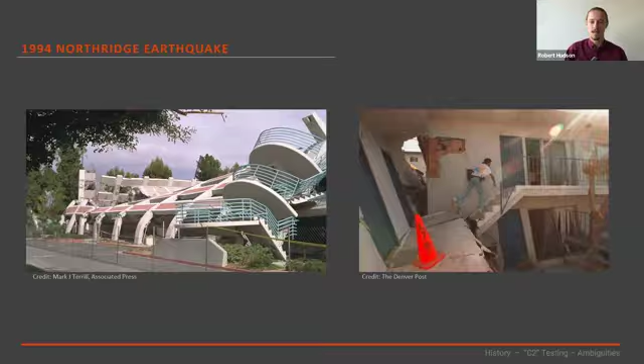But believe it or not, prior to this, the industry was using monotonic capacities in uncracked concrete to design post-installed anchors in concrete, which I suspect we can all intuit isn't going to be appropriate for a lot of the design we're doing for post-installed anchors in seismic regions. As a result, there was pretty widespread failure of anchors, among many other things, which is to some degree understandable in an event this size. But the anchors were really a highlight, or at least one of the highlights that came out of this earthquake in terms of learnings.

So much so that the US banned post-installed anchors completely in seismic applications for the best part of 2 years. This is kind of a timeline of what we have seen since then.

The industry, especially in the US, primarily led this effort, but there was an effort to put together a method for seismically rating post-installed anchors in concrete, basically looking at how concrete behaves, the cracking mechanisms of concrete, and the seismic actions we expect and allow for on anchors in a seismic event. The first codified method for this didn't get implemented until 2001, through the US Concrete Code, specifically ACI 355.

Interestingly, they didn't invent this method. The Canadian nuclear industry had already been using it for post-installed anchors in their nuclear facilities, which they deemed at the time, probably quite responsibly, that they should have a higher level of redundancy for post-installed anchors in these contexts. And so that was adopted into the American Concrete Code.

Then in 2013, the Europeans came to the party and developed what most of us in New Zealand are most familiar with, which is the C1 and C2 tiered rating system for post-installed anchors.

A quick note on the code terminology. In 2016, the Europeans did slightly restructure how they publish their codes. So while we're often familiar with the reference to ETAG 001 Annex E, this actually isn't quite the right reference anymore. They just restructured how they do their codes. The content didn't meaningfully change.

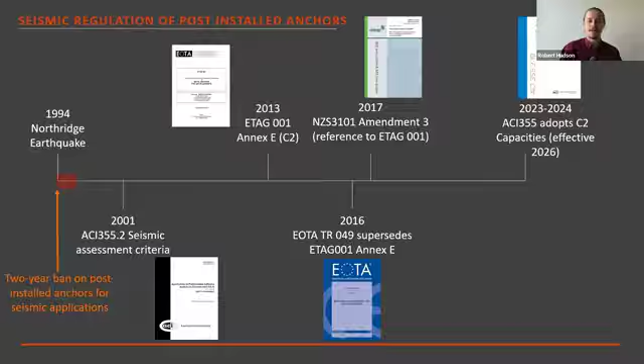And then 2017 is when we came to the party, and everyone on this call will almost certainly be very familiar with this. We start referencing the Eurocode documents and in effect start using C2 capacities all over the country.

What I think is really interesting about this, but I am a bit of an anchor nerd at this point, is that this really isn't a static part of our industry. This really is still developing across the world.

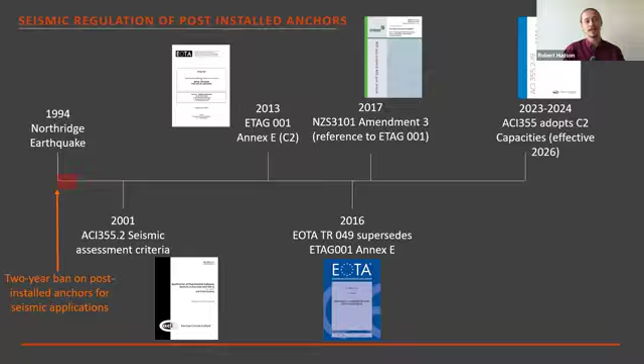In the US, the ACI 355 committee has already approved, and it's going through the process of getting implemented into the next code, pretty serious changes to ACI 355. They are completely removing what we consider as C1 and will be implementing C2 as the appropriate capacity to use for any anchor in a seismic zone in the US.

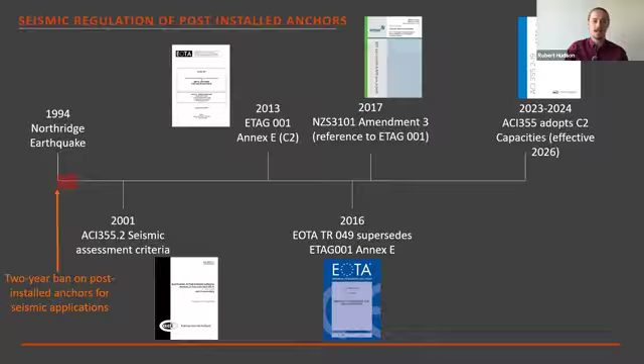So they will not even have the kind of tiered system that Europe has. They will just have the non-seismic zone and C2 capacities. This really does seem to be more and more the way that the world is moving in terms of post-installed anchor design.

Now, in terms of what we're doing in New Zealand, many of you will have seen and read this a number of times. All of this comes from one sentence in NZS 3101, which is kind of amusing: post-installed mechanical anchors and post-installed adhesive anchors shall pass the pre-qualification testing stipulated in ETAG 001 Annex E and be designed in accordance with EOTA Technical Report 045.

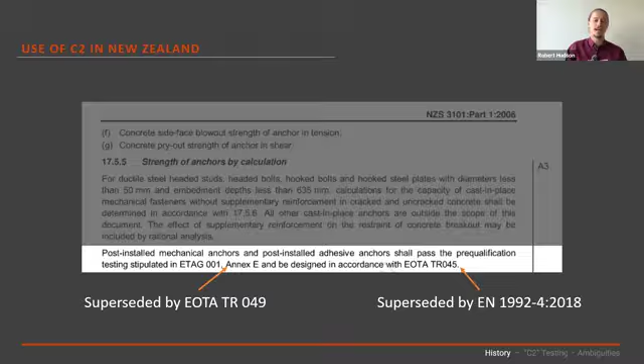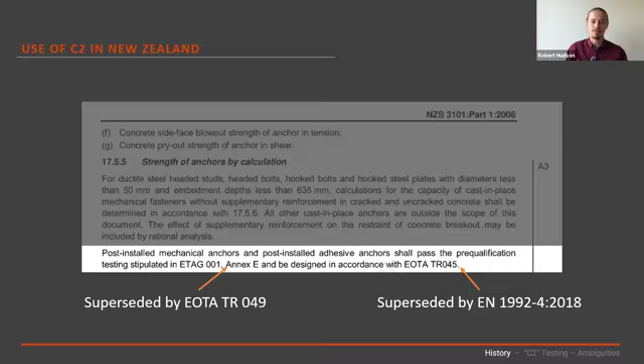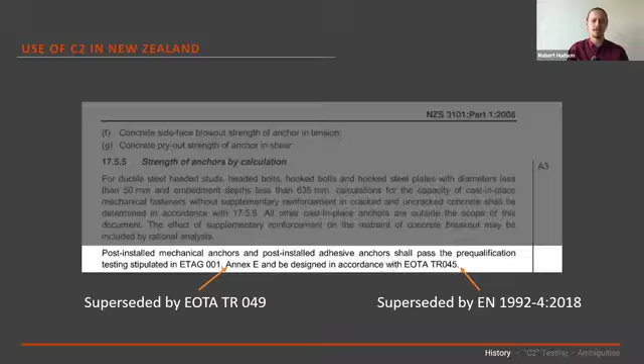As I mentioned before, technically both of these references are actually out of date. The significance of this in terms of content is pretty negligible, but I highlight it here so that if you see it in suppliers' documentation, the ones down the bottom are the appropriate codes to be referencing. The actual content difference is fairly negligible, but you'd expect to see on supplier documentation a reference to Technical Report 049 instead of ETAG 001.

And Eurocode 2 for the design.

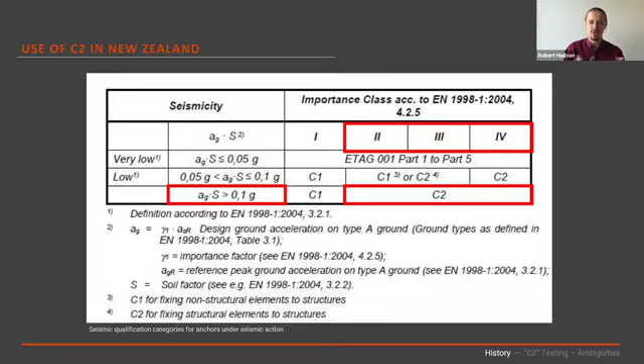In terms of why we have such a focus on C2 rather than C1 in New Zealand, this is the table out of Eurocode that defines what capacity you should be using for an anchor. It's basically just a function of seismicity and importance class. The importance classes in the Eurocode do align pretty well with what we have in 1170 in New Zealand, so for the most part you can just take them as a direct comparison.

The seismicity does take a little bit of effort to compare properly. There was a paper a couple of years ago, or maybe more recently, that was published doing an example calculation.

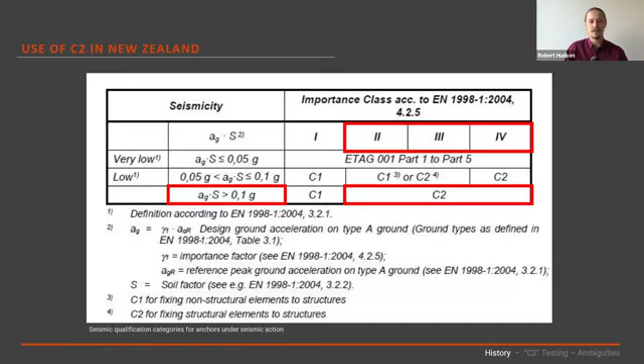It does give you slightly different results if you compare it directly to 1170. But as a general rule, for the vast majority of what we're doing in New Zealand, we have a seismicity greater than 0.1 G. And unless you're dealing with an importance class or importance level building 1, or you're dealing with a shack at the very top of the North Island, you're almost certainly going to be required, following our code, to be using C2 capacities. And that's the situation we're in, and why this is really front of mind for so many engineers in New Zealand.

Okay, so that's a little bit about how we got to where we got to. The next section here, I'm going to do a bit of a dive into the testing that we do, or any supplier does, to actually provide a C2 capacity, and some of the background as to why the testing is the way it is. I'm not going to go into the testing itself, the intent here isn't for you to be able to go away and do the testing. The intent here is I'm concentrating on the things that are relevant to be aware of and to think about when you're designing such anchors, so you can make appropriate considerations where it's relevant.

Now, taking a step back for just a second, there's two things we really care about with anchors in seismic scenarios or seismic locations in concrete. We care about the actions on the anchor, so that's the cyclic tension and cyclic shear behavior. And then there's also the behavior of the concrete, and more explicitly, the cracking behavior of the concrete. Quite intuitively, if we start having cracks in our concrete and our anchors are in those cracks, that's obviously going to impact the performance of any post-installed anchor.

Take the extreme case where your crack starts becoming wider than your anchor, it's going to fall out of the hole. Thankfully, we don't often have that scenario, but it's a spectrum, right? And the larger the crack, the more impact we have. But there is this baseline assumption when we talk about this, that we are allowing for, when cracking occurs in concrete, that crack will occur where that anchor is. And this wasn't just good judgment.

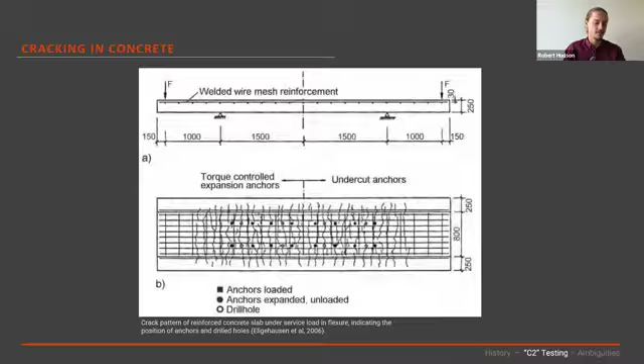This was actually based on a research program that was done in California in the 2000s. I've got a screenshot for one of the test results there. The idea behind this, and it was one of the test programs that was trying to build the data that was required to build these test programs for anchors, but what that was looking at is what is the probability that when we get cracking occurring in concrete, that crack occurs where our post-installed anchors are.

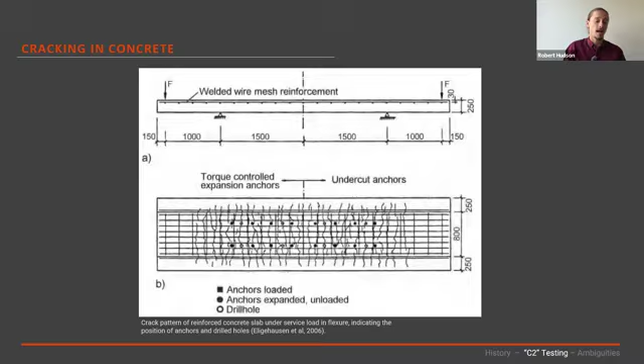And the key takeaway is that it's very, very likely, much above random. And this makes a lot of sense. We have a very homogeneous, or reasonably homogeneous material. If we put an anchor into it, it acts as a stress raiser. And then when we start getting cracking occurring in these concrete units, which we do even under just service loads, right, but definitely under design level loading, because you have a stress raiser there, there's a very, very good chance that crack occurs where the anchor is. And so the baseline assumption is that if we're putting an anchor into concrete or reinforced concrete, we are assuming that when cracking occurs, that cracking is going to happen where that anchor is. And that's a pretty reasonable assumption in my mind.

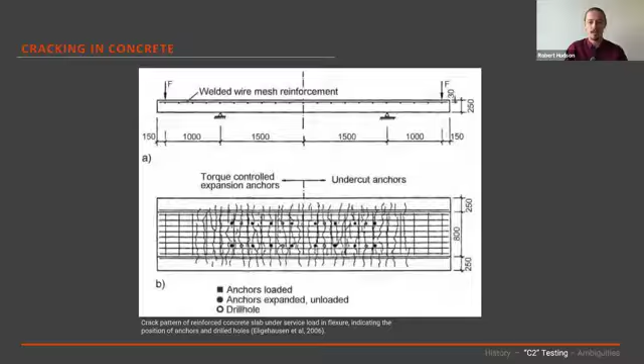The other thing we care about with regards to cracking is the size, right? The larger it's going to be, the more of an adverse impact it's going to have on our post-installed anchor connections. Now, there are two numbers to be aware of, and I suspect you're all going to be sick of me saying these numbers by the end of the webinar, but there is a 0.5 mil crack width and a 0.8 mil crack width. The 0.5 mil crack width is very roughly intended to represent service conditions and moderate seismic events, and this is the crack width that a C1 capacity is allowing for.

And then we have that slightly larger one, which is a 0.8 mil crack width, and this is what a C2 capacity is allowing for. That 0.8 mil crack width is intended to represent basically the scenario where you have a reinforced concrete beam. If you come just outside of the plastic hinge zone, and then you load that minimally reinforced concrete beam to the point where you just start getting yielding in the tension reinforcement, the 0.8 mils is a prediction of the crack width at that point in that scenario.

So when you're just getting yielding of your reinforcing in your concrete beams, that's what it's trying to represent, and that's what we use in a C2 test.

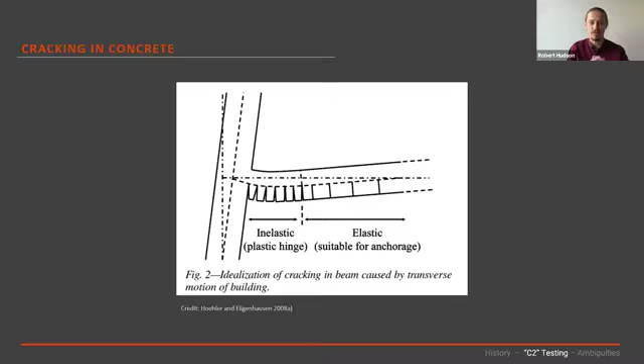Quick note, as everyone should be aware, there is really no test program or way for anyone to rate post-installed anchors in plastic hinge zones. The damage and cracking we expect in a plastic hinge zone in a seismic event is pretty dramatic, and nobody's providing you a capacity for that. As a general rule, if you're wanting an anchor to perform in a seismic event, you really probably just shouldn't be using post-installed anchors in plastic hinge zones.

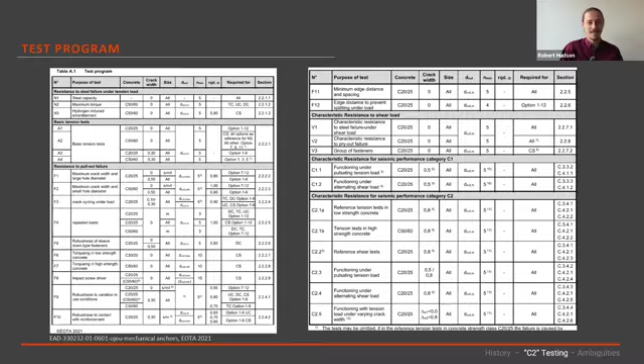Okay, the test program. So this is a snip from the European documents on the tests you need to run to rate a post-installed anchor in concrete. The ones of relevance for us are on the right-hand side in red. You can see the C1 tests for producing a C1 capacity, and the ones on the bottom right are all the tests you have to run for C2 capacities. There's actually a whole range of other interesting tests in here too.

So you have these tension tests. You are allowing for, in general, things like variability of drill bit diameter, the impact that slight changes in pilot hole have on anchor performance, things like over-torquing and under-torquing of different types of anchors. So there's a little bit of extra stuff that goes into the test program, but what we're really going to concentrate on in this talk is the stuff on the right, which is the C1 and primarily the C2 tests.

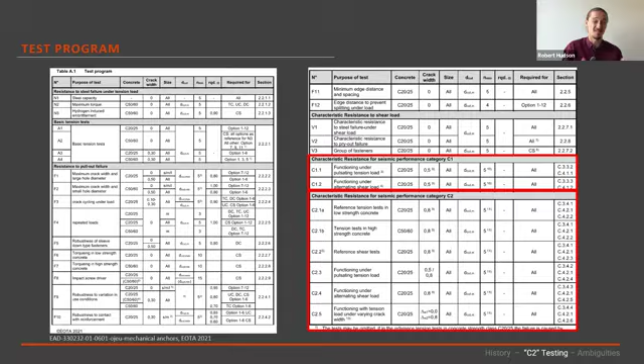And these tests can basically be boiled down to trying to allow for and quantify the impact of three mechanisms. The first one we care about is the impact of cyclic shear. This is quite intuitive: if you have a reinforced concrete frame or a steel moment frame connected for in-plane strengthening to a reinforced concrete structure, you're going to get cyclic shear behavior in your anchors.

The next mechanism is cyclic tension in the anchor. This is also quite intuitive — if you've connected strong backs or some such connection, you're going to get cyclic tension behavior in that anchor. These are the two mechanisms that a C1 capacity allows for. So when we do C1 testing, we're allowing for these two mechanisms, and for crack widths up to 0.5 mils.

What a C2 capacity additionally allows for is this last mechanism, cyclic crack behavior in the concrete. There's a number of scenarios where this occurs, but the clearest is if we think about a reinforced concrete moment frame beam. If we put that frame into a seismic event, we get moment reversal in the beam, meaning our cracks both open and close. Because we assume our anchor is in the crack, these cracks open and close around our anchors, which obviously impacts how the anchor behaves.

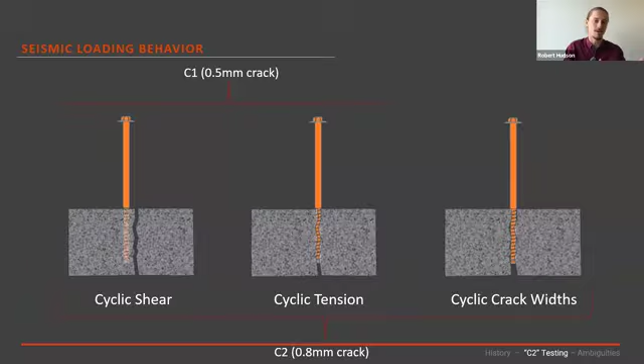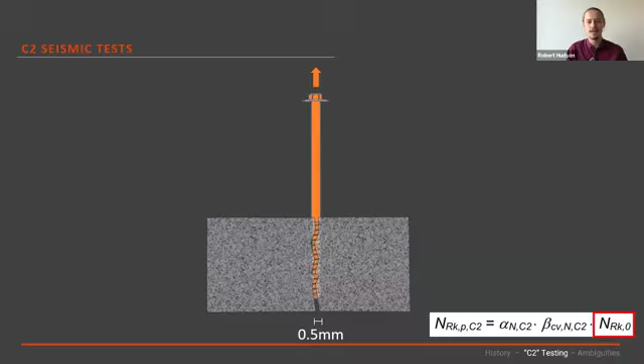Our baseline is just the monotonic tension capacity of an anchor in a crack. It's actually using the 0.5 mil crack, which is that moderate seismicity, serviceability kind of baseline performance of an anchor in a crack. And then we have this alpha and beta reduction factor that we apply.

The alpha factor is trying to represent the loss in load carrying capacity from each of the mechanisms that I showed before: your cyclic tension loading on the anchor, the additional wide 0.8 mil crack width, and the cyclic crack behavior around the anchor. The formula for C1, by the way, is exactly the same. It's just accounting for less mechanisms.

So we have a couple of tests we do. We have this monotonic test in the slightly larger crack width, which investigates what the additional crack width impact is. And then we do a cyclic tension test on the anchor in a crack, and we have the cyclic crack test. One thing to highlight here is that we don't actually superimpose the impact of the cyclic tension test

and cyclic crack test. This is quite good, because otherwise the capacities would be even lower. But this was based on a really nice piece of research that was done, again around the same time, in California or the University of Stuttgart.

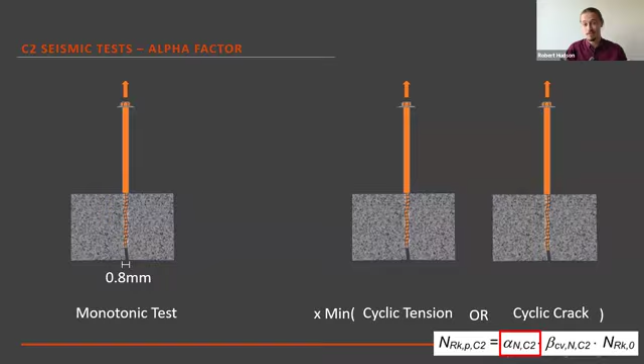What they did is they built a reinforced concrete frame. They put a simulated non-structural element underneath the reinforced concrete beam. They put it through thousands of cycles, and they measured across time the tension in the anchors and the crack widths. Basically what they found is that the maximum of each don't occur at the same time. So when we're generating these capacities, we actually just account for whichever one has the most adverse impact.

Now, to give you a sense of scale of the impacts of these two tests, this will vary quite significantly depending on the type of anchor you're using. Some anchors are quite resilient to some of these mechanisms, others are less resilient.

But it would not be unusual to expect a reduction factor from the cyclic tension test in the range of about 0.9, so maybe a 10% reduction in capacity. And the kind of reduction factors that I might expect if I was testing an anchor and putting it through the cyclic crack test would be in the range of 0.2 to 0.3, which is a 70 to 80% reduction in anchor capacity.

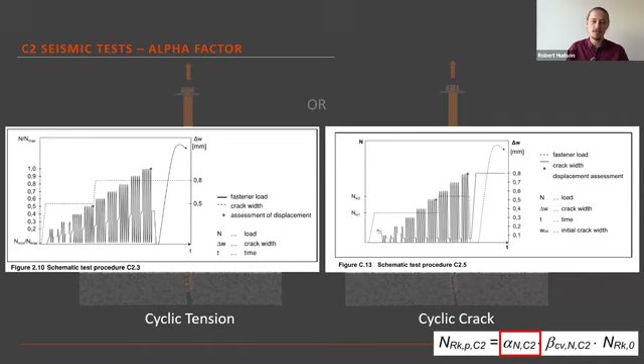Overwhelmingly, the reason that our C2 capacities are so much lower than what we used to use is because of the cyclic crack test. This is the test that C1 doesn't take into account, which is why C1 capacities are significantly higher.

Now, when we were doing this testing, we started playing around in our own lab with some of the variables. We wanted to understand the sensitivity of these variables, because you'd get some test programs where your variable is set as a number and you could increase it and decrease it, and it's not that sensitive and doesn't really have a big impact on the outcome. So we wanted to understand how sensitive these variables were to the end result we were getting. We played around with it a little bit, and the conclusion was they're incredibly sensitive.

The two variables that we care about here are the crack width, so that 0.8 mils, and the number of cycles that we're putting the crack cycle test through. If you have a crack width that's a little bit more than 0.8 mils, you get a significant reduction in capacity.

If it's a little bit less than 0.8 mils, you get a significant increase in capacity. Similarly for the number of cycles, especially at maximum crack width, if you add more cycles to that test, your capacity drops. And if you reduce the number of cycles, your anchor capacity increases significantly. This will be important for something I'll mention later in the presentation.

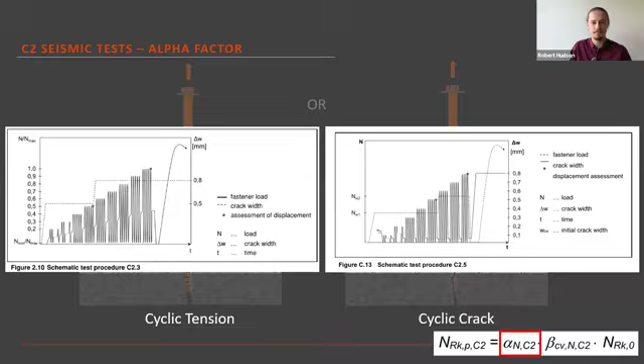Just quickly on the beta factor, what this is doing is accounting for displacement performance of anchors. It doesn't, in my experience, really have a big impact on the end result in terms of the capacity. Might have a little bit, but not a big reduction. But what it does do is it has pass-fail requirements.

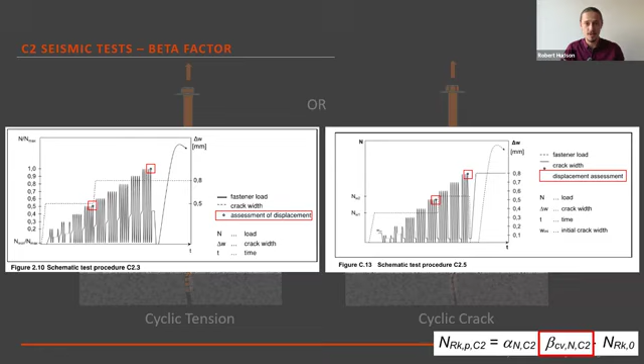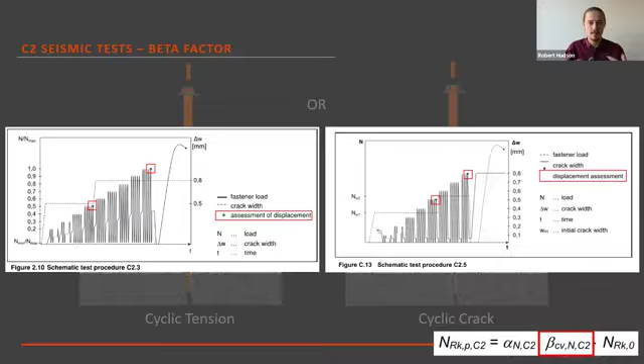It's making sure the two things it cares about basically is the spread of displacements across multiple tests. So what you're protecting against there is unpredictable displacement performance of anchors, which is not something we want. It also has a maximum displacement of 7 mils in the test. So if you have any anchor that is displacing unreasonably far in these test programs, it basically just doesn't allow it to get a C2 capacity. And these are pretty reasonable things.

We don't want our anchors to displace a huge amount when we're using them. We're not accounting for that in design. But the actual impact on the end result is reasonably minimal. It's more of a pass-fail kind of thing with regards to displacement performance.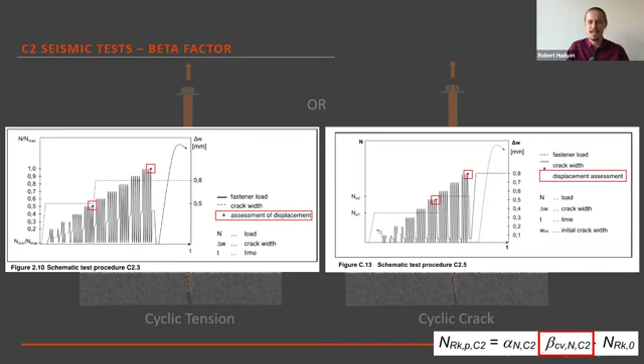Basically, when it's all said and done, that's where this C2 capacity comes from. There's a couple of vocabulary things that might be worth noting.

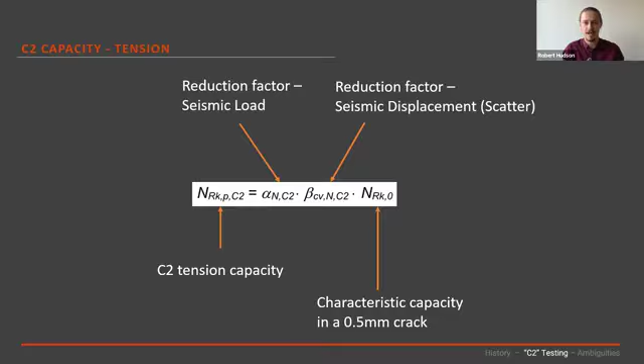You'll see in supplier documentation, or especially any European country that sells products in New Zealand, they'll be using the European language. We often call things capacities. The language you'll see published in documents from Europe will be resistance — synonymous, really the same thing. The reduction factor, the strength reduction factor that gets applied in Europe is called a partial factor, represented by a gamma. It varies depending on a couple of aspects, but often suppliers have already applied it. If that's already applied, you wouldn't then go and apply the New Zealand strength reduction factors on top of that. They try to achieve the same thing effectively.

All right, that is basically where tension capacities come from, C2 capacities. Obviously, you do a similar sort of thing for shear. I'm not going to go into this in the same sort of detail, but it is exactly the same philosophy. You start with your base shear capacity, you have reduction factors, your alpha and beta reduction factors based on the impact of the different mechanisms.

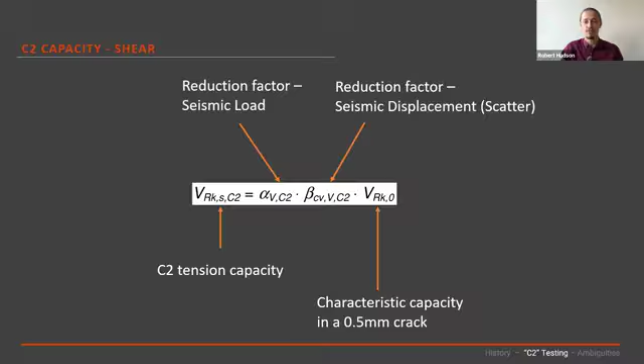Now, one thing that is interesting with shear capacities is we don't run that cyclic crack test. This is because someone did a really nifty study, which has probably saved hundreds of thousands, if not millions of dollars worldwide in anchor testing, that basically compared the impact of the cyclic shear test and the impact of the cyclic crack test on the shear performance of post-installed anchors, and basically found that the cyclic shear test was reliably more adverse. So we're able to exclude one of these tests from the shear testing.

Which means that the mechanisms that C1 and C2 are allowing for are actually the same. With regards to shear capacities, the main difference is just that we're allowing for a larger crack width. That does have a negative impact on anchor performance, obviously, but that really is the main difference between the two.

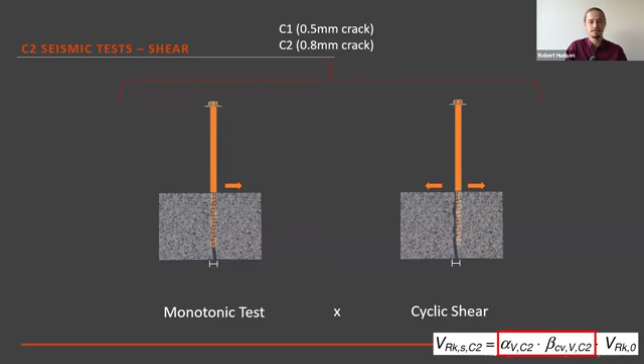And then that's actually the test you run for cyclic shear. You're bringing your anchor into negative and positive shear in both directions. Quite often, for some anchors, you start getting kind of steel failure governing, especially if you're at deep embedment, which is a really positive failure mechanism with regards to anchor performance, rather than pry out or anything like that. In general, even when you start putting seismic things into anchors, shear performance is a pretty reliable mechanism, because at the end of the day, you've got a piece of steel in a substrate.

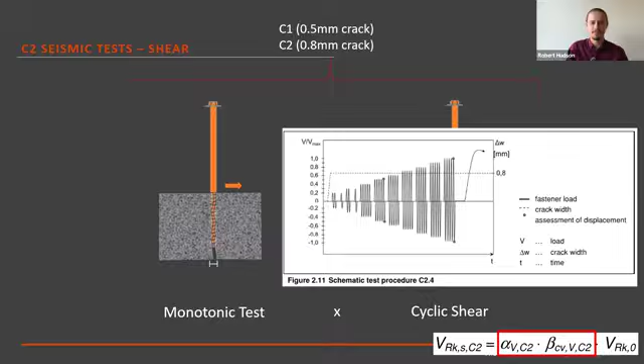Okay, that is, broadly speaking, where we are getting these capacities.

Now, this next section, I have a number — I'm basically wanting to highlight a couple of things that I think designers should be aware of and thinking about when you're doing these kinds of designs with these values. A bit of a caveat here: it's really easy to pick apart other people's work, and putting together these kind of test procedures would just be a monumental effort. The amount of research that is required, and even just the code development process, is a huge amount of work. But it still is useful for us to highlight where it doesn't fit what we do quite perfectly, so that designers like yourselves can understand what's going on and accommodate this a little bit better in design. So this is some of the kind of ambiguities around these test procedures.

Okay, the first one, crack widths. So I showed this image before when I was talking about where the crack widths came from. If anyone wants lots of bedtime reading, you can Google the Unified Crack Protocols, which is where all this comes from.

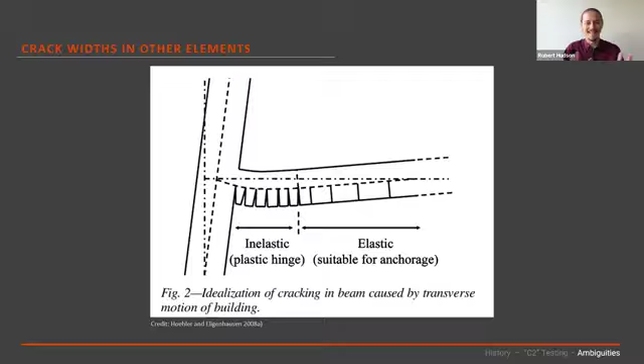But we have two crack widths that we care about when talking about C1 and C2 capacities: the 0.5 mil crack width and the 0.8 mil crack width. Now, I have not been able to find any published justification for the 0.5 mil crack width. I've talked to many people who are very knowledgeable in this area, I've looked myself, and for love nor money, we cannot understand where this 0.5 mil crack width comes from.

That's not to say it's wrong or misrepresentative, but I certainly don't, and nobody I know can really justify why we use 0.5 mils rather than 0.6 or 0.4. It's possible it was just a judgment call based on experience. From a design point of view, be aware that if you're using a C1 capacity, fundamentally you're allowing for a 0.5 mil wide crack maximum. If you're expecting cracks larger than that, your C1 capacity won't be a very good representation. If your cracks are smaller, your capacity is going to be a little conservative. So keep in mind that C1 capacity corresponds to that 0.5 mil crack width.

Now, there is published justification for where the 0.8 mil crack width for C2 capacities comes from. That's from a research study, and I've got a screenshot on the screen. It's basically looking at the elastic portion of a reinforced concrete beam, minimally reinforced, pretty standard size. You load it, and when you start getting yielding in the reinforcing bars, they used predictive crack width equations to estimate that the crack width at that point would be 0.8 mils.

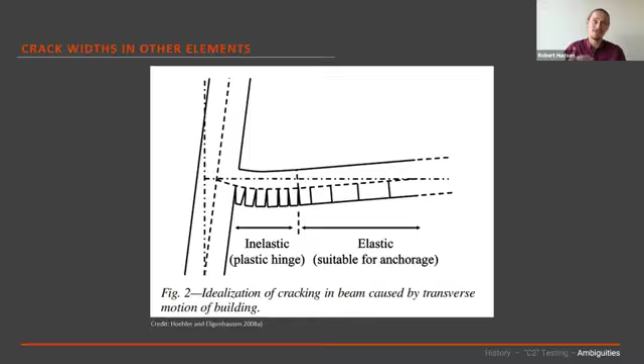They had to pick something, but it's not immediately obvious to me how universal this 0.8 mil crack width is. If we have a really deep beam or a heavily reinforced beam, it seems intuitive those cracking behaviors would be different. The predictive formulas they used were empirical, developed on reinforced concrete beams in the elastic range, so whether that translates to the point of yield isn't certain.

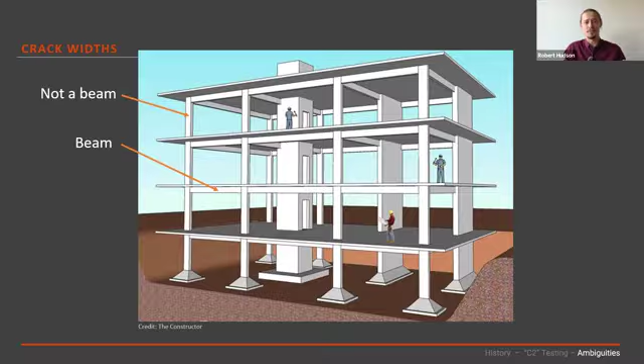The other aspect is that there's a lot more than beams that we deal with. So let's take a step back, back to first year engineering school, where we have a building structure and can look at the different elements. We have beams—excellent, beams are good, very important. We also have not-beams. That's not a beam. That is also not a beam. Still not a beam. Definitely also not a beam. I'm being a little facetious, but I hope the point comes across.

This 0.8 mil crack width apparently has been developed for reinforced concrete beams. It's not immediately obvious to me that it translates perfectly well to other elements in a reinforced concrete structure. Maybe it does—not sure.

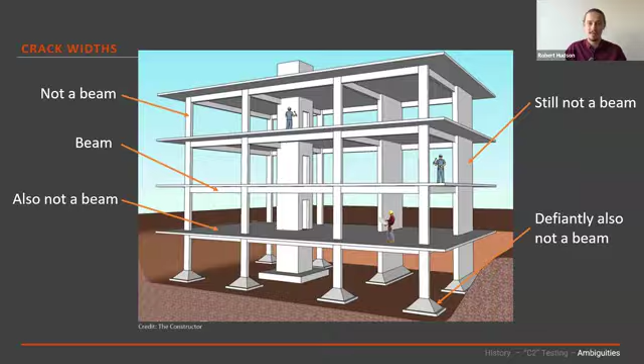From a design point of view, the really important thing to keep in mind is that if you're using a C2 capacity, what you're actually allowing for is a crack width up to 0.8 mils. If for whatever reason you're expecting cracks larger than that, the C2 capacity is probably not very appropriate—it's probably overrating the capacity. Similarly, if you're expecting cracks less than that, your capacity is going to be quite conservative. One of the reasons we started playing around in the lab, trying to figure out how sensitive things like crack widths were to the end result, is because we wanted to understand how much this matters. And it's really sensitive—the outcome really depends on what your crack width is. So it's really important as a designer to be aware that when you use these values, that is what you're allowing for, and that's what's been tested behind the value you're using.

So the other parameter I mentioned in that critical crack cycling test that has a big impact on the end result is the number of cycles we do at the largest crack width. Basically the number of 0.8 mil wide crack width cycles we run has a big impact. You can imagine this: if you're opening or closing a crack around an anchor, you're crushing the concrete around it, turning things to debris. Do that enough times and your anchor won't be able to hold on to anything. There's nothing left for it to hold on to.

Now when you start digging into where the number of cycles and things like this come from, I've mentioned that a lot of this testing comes out of California, in the 2000s, which isn't a problem in itself. But when they started developing these crack protocols, they very rationally used their local seismicity. So these were all developed based on a 90th percentile 475-year return period earthquake in LA, which equates to a 10% probability of exceedance in 50 years.

That's all well and good, except there's no way for you to scale this when testing to any other return period of earthquake. And there's definitely no way that I'm aware of, at least in design, for a designer to scale that for a longer or shorter design life structure.

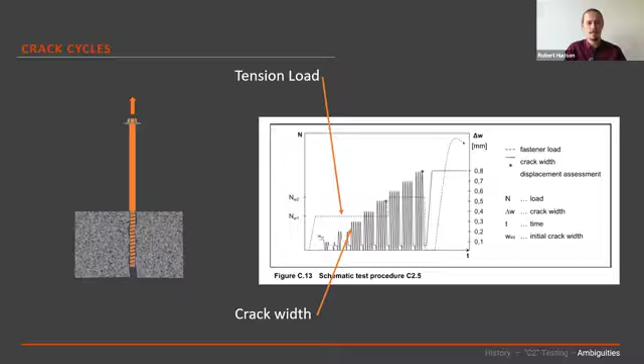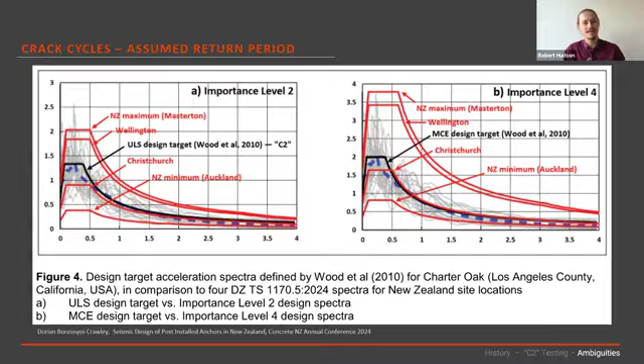Just to re-emphasize that point, this was put together by a guy called Dorian at the WSP concrete research lab down in Wellington. He's written a few papers on this in the last couple of years if you want to dive into the weeds. He's compared the ULS design target and the maximum considered earthquake, which is part of the US codes, to importance level 2 and importance level 4 response spectrums across New Zealand. You can see it's obviously a range — not all one level of response spectrum. That's just something built into how we're testing these anchors and what we're doing in design.

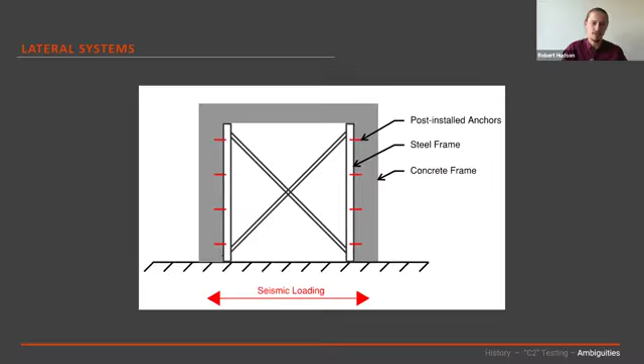So say we have a scenario — there are many different scenarios this could come up in, but I'm just using this as an example. Let's say we have a reinforced concrete frame building. We go in and retrofit it for whatever reason, say to bring the drifts down, and we put in a big steel brace frame. We've designed it to be much stiffer than the existing concrete frame, so we're not really expecting the concrete to displace to the point of yielding in the reinforcing — we're expecting most of the lateral load to be carried by the steel. In this scenario, at what point are we getting 0.8 mil cracks associated with yielding of the reinforcing in our reinforced concrete structure?

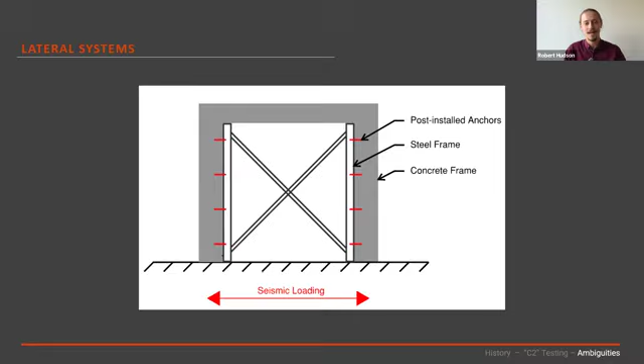The reality is we're probably not within the scenarios we're designing for. This isn't necessarily a problem — it's conservative, so put in some more anchors, not the end of the world in this scenario. But it's quite good to be aware that if you've got smaller crack widths than that magic 0.8 mil number, you've got some conservatism in your anchors — put them up to 100% utilization, you can sleep very well at night. So just understanding where you sit in terms of how much conservatism is there, I think is quite beneficial from a design point of view.

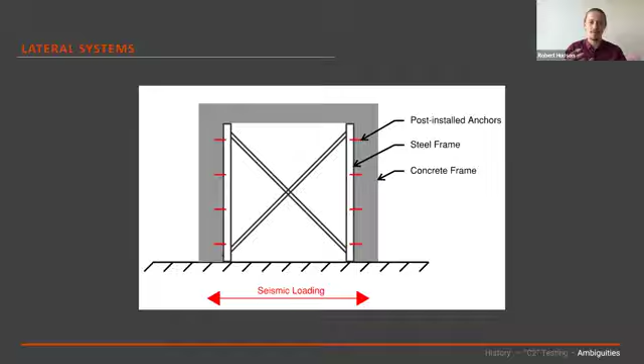The next one that's also pretty clear cut.

That's really important in reinforced concrete. We have to get cracking in reinforced concrete for it to behave as we design, because you need that reinforcing to be engaged. Things like pre-stressed concrete are an entirely different mechanism. For pre-stressed concrete, you're relying on compression from the pre-stressed strands, or if you post-tension a reinforced concrete section, this might be the same. You're relying on compression across the cross-section to resist those loads. You're not relying on cracking to enable engagement of reinforcing and yielding of steel.

Because we don't expect the same kind of cracking behavior, C2 capacities or C1 capacities perhaps don't really represent the scenario very well. Where we are getting crack widths less than what is used in the testing, the capacities we use are going to be very conservative.

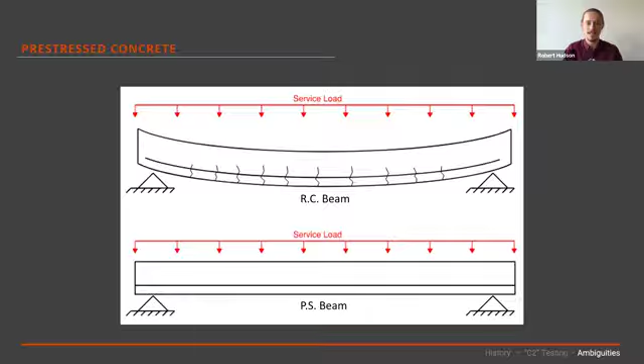So if you're putting stuff into pre-stressed beams and just doing a connection, and because 3101.1 tells you to use a C2 capacity, and if you're just a little bit handcuffed by that, which in most scenarios in New Zealand kind of are at the moment, at the very least, know that you have a lot of redundancy in that anchor, and you can put that up to a really high utilization, and it won't be an issue.

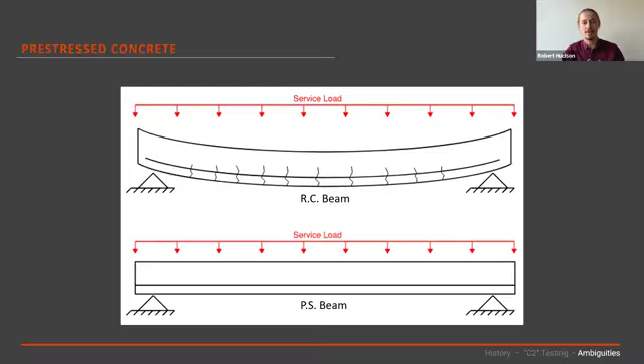Some exceptions there. Obviously all of these are generalizations. You obviously can get cracking in pre-stressed elements, and anyone who's looked at any of the precast floors team's pretty impressive work over the last couple of years - if you're looking at hollow core units or any kind of pre-stressed unit, and you're dealing with the edges, especially from an alpha unit, you're going to get pretty significant cracking in those areas. So it's not that they never crack, but in many cases we're dealing with a different system to reinforced concrete.

Now, there are a range of different applications where this happens. This one is one we're quite familiar with because Python is a hollow core anchor, and so this is one we come across quite often. But there are other scenarios where you get this effect happening. What I've got there on the left is a comparison in the load resisting mechanisms between a post-installed anchor and a through bolt connection. We obviously don't use C2 capacities for through bolts - it's not a post-installed anchor. You can look at that little sketch there for tension loading.

You can see when we load it in tension, what we actually have is a bearing connection, right? It's a plate on the top that's bearing on the top. It's a bearing connection, it's not a post-installed connection. C2 capacities don't mean anything. And similarly, if we look at the shear mechanism, we're loading that from the underside of the slab. Your shear mechanism is a bearing connection between the steel shank of the rod and the concrete underneath the core.

If we look at the post-installed anchor in this scenario, if we look at the tension connection, that really is a post-installed connection. You've got a post-installed connection between the thread, if you're using a screw anchor, or the epoxy if you're using an epoxy anchor, and the concrete. So 3101.1 tells us to use a C2 capacity there. We know in the back of our minds it's probably a little bit conservative if it's in the middle of a pre-stressed unit. We're not expecting a lot of cracking, but the codes tell us we have to use a C2 capacity.

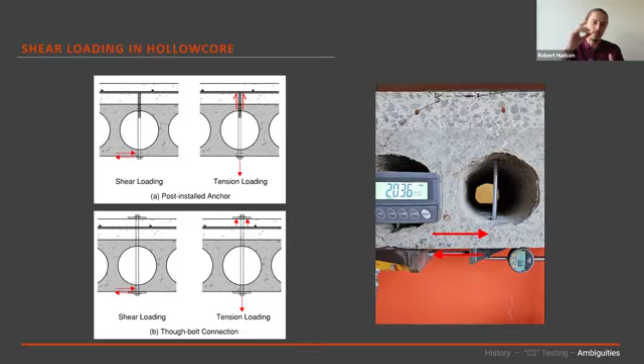But the shear loading scenario is a little bit different, and this is for where we have an offset between the post-installed connection and the point of shear resistance. When we load one of these anchors from underneath the hollow core unit, the actual load resisting mechanism is exactly the same as the through bolt, right? We've got a steel shank, we're bearing that against concrete. It's a bearing connection, that's not a post-installed connection. The C2 shear capacities have nothing to tell us about how that's going to perform.

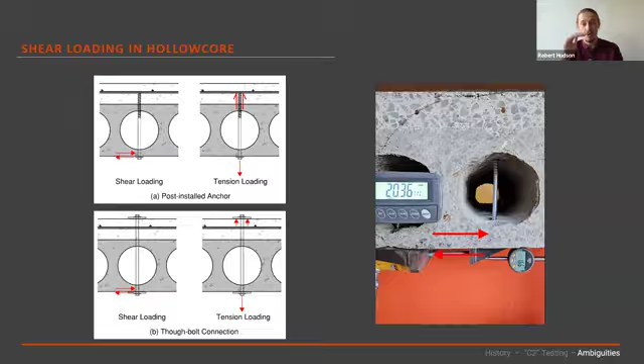So every now and again, you do come across a scenario where your anchor in shear is actually behaving as a bearing mechanism and not as a post-installed connection. One thing to really highlight so this doesn't get misinterpreted: if you had a solid piece of material and you went into the solid piece of material, that would be a post-installed connection in shear, because you're going to get that cracking occurring around that post-installed connection area.

A little bit on codes and standards. Most countries, definitely New Zealand, I think probably all codes and standards around the world, at least all the major countries, are built in a hierarchy.

We have our building act and the building code, then our standards, and the standards are in a hierarchy. We have our loading standards, our material standards, and our specific design application standards.

I believe there are bits in those codes where you could reasonably read it and interpret that the appropriate thing to do is use a C1 capacity. Technically, from a purely code compliance point of view, because these are all specific design standards, they're all subservient to 3101. And because it's a reference in 3101 that's causing us to use C2 capacities, technically that overrules anything in those specific design standards. That's not a comment on anything other than technical code compliance. If you're doing a verification method, technically that's the way our codes are structured.

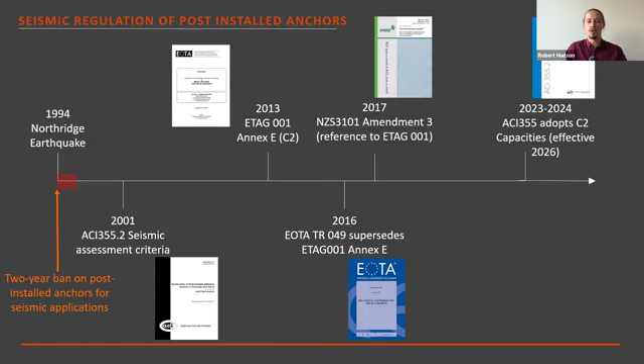Now, a comment more broadly on this. This really isn't a stagnant part of our industry. This is ongoing. There is a lot of drama going on in the US industry, as you might expect, with the most recent updates to ACI 355. There is a bit of a movement by some people to try and dial back the degree of change here, to try and go towards a scaled system for various reasons. I suspect they won't have much success, just because of how the process works rather than anything else. So I really expect that will proceed as written, and when that next code change comes into effect, which I think is next year, possibly '27, but next '26 or '27, the US will be only using C2 capacities. But there's obviously a lot of work in this space for the industry as a whole to improve what we're doing, clearly.

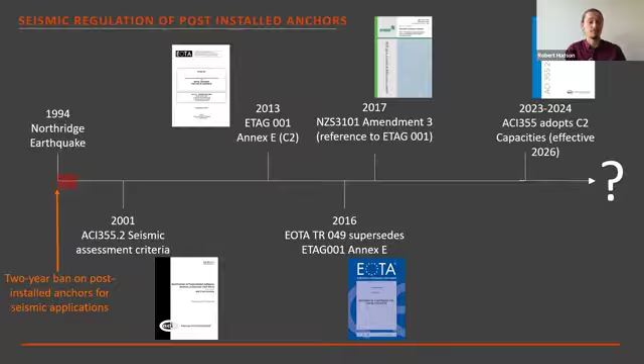And while it is a relatively small part perhaps of what most designers think about on a day-to-day basis, it can have a pretty big impact on the job as a whole. So I'll leave you with a final comment that I think is important for us to keep in mind. It is the case that the individuals who know the most about anchors know this because they work with anchors, but everything that gets published in the industry really should be angled towards giving designers what they need to, A, understand what they're using, and B, giving them the information they need to achieve the design intent. It's really important that when we're building assessment criteria, they exist to support the designer in that goal, rather than helping suppliers differentiate products. So I think it is something that we just have to keep in front of mind, and see it as the role of industry organizations like Engineering New Zealand, SESOC, NZSEE to promote this on behalf of designers.